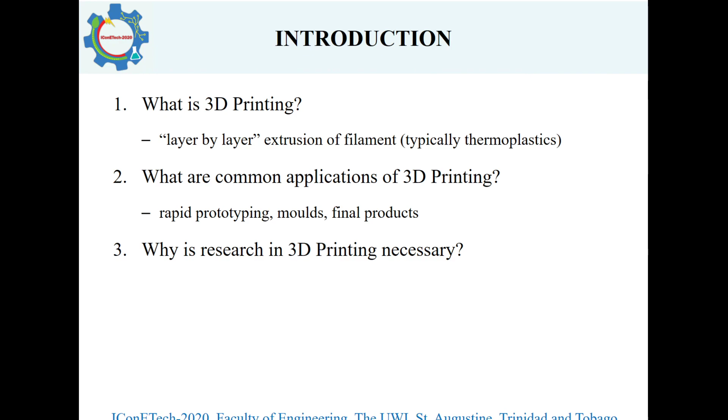Why is it important? To compete with traditional plastic forming methods, products made with 3D printing must have comparable or better mechanical properties, meaning research and development in this area is very important in making 3D printing a viable option for manufacturers to generate revenue and diversify the economy. What type of research is required? The key research areas include how the chemical makeup of the filament and the operational or print parameters being used in the process affects the mechanical properties of the final product. That is, strength, heat resistance, among others.

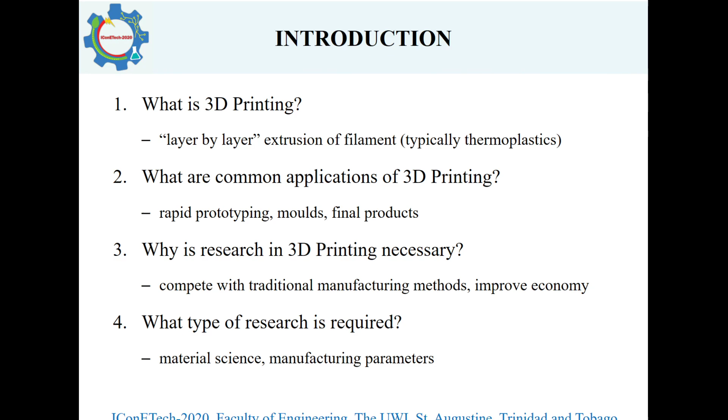This brings me to the objectives of this paper, which are to look at past research trends in a literature review to determine what materials, print parameters, response variables, and optimization methods were used previously in order to perform a gap analysis on the data to see where we can add value. Then we will want to develop an experimental setup, perform the experiments and collect the data, analyze the data, and then perform optimizations to enhance the mechanical properties going forward for manufacturers. Finally, we have to do some validation experiments on the optimized samples and make conclusions based on the outcome of the tests.

So without delving heavily into the literature review, it was found that the tensile strength was the most commonly measured property for 3D printed samples, sort of a benchmark test for strength. However, in order to maximize the use of 3D printing, products must be able to withstand forces in all directions. This will allow manufacturers to design and create products for a wider range of applications, while maintaining the strength desired for their use. As such, there seems to be a lack of information on the flexural strength of these products, which, if more understood, will allow for better design of products susceptible to deformation and buckling under compressive loads. Further, it was observed that ABS plastic was one of the most studied materials due to its extensive industrial use at a relatively low cost.

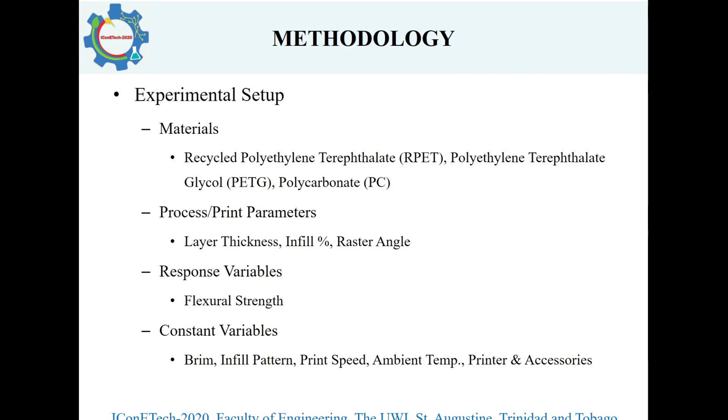So for this paper, the experimental setup includes using recycled polyethylene terephthalate (RPET), polyethylene terephthalate glycol (PETG), and polycarbonate (PC) samples, with the print parameters being adjusted for each sample: the layer thickness, infill percentage, and raster angle. The response variable being measured is the flexural strength, and some of the variables being kept constant are the brim, infill pattern, print speed, temperatures, the printer being used, and all accessories including nozzles, beds, etc.

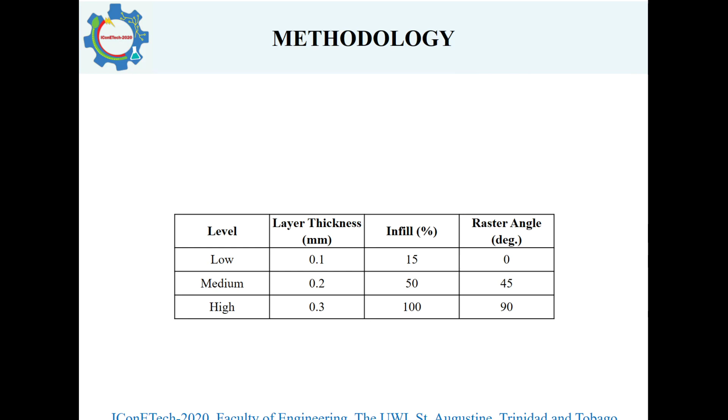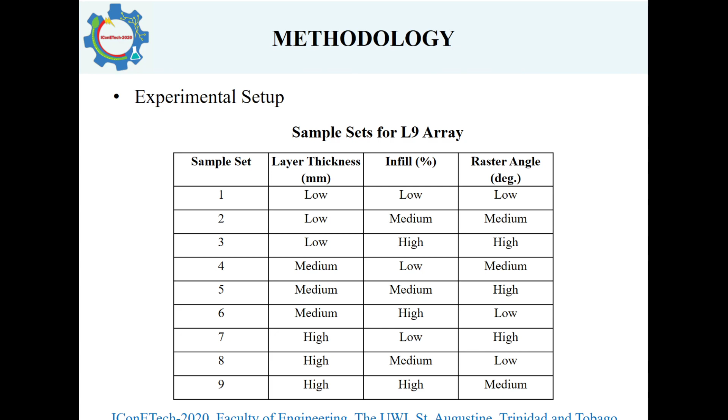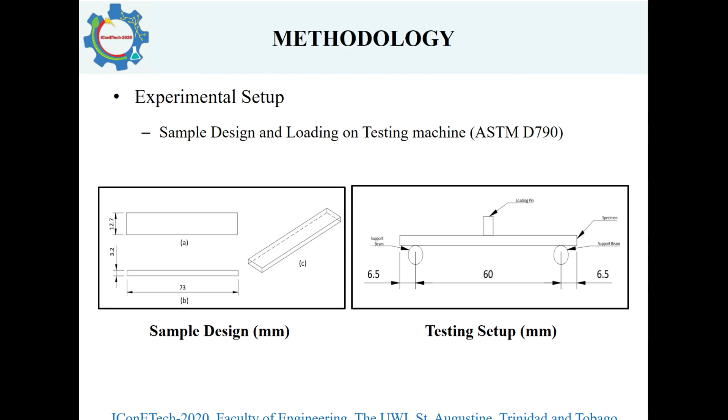The machine produces a load extension curve, which gives you the maximum force and the extension at which it occurs, using the formula in equation 1, where sigma F denotes the flexural strength of the sample at the midpoint, P represents the point load, L is the support span, B the beam width, and D the beam depth of the sample. This formula is used with the maximum load to determine the maximum flexural strength of the samples.

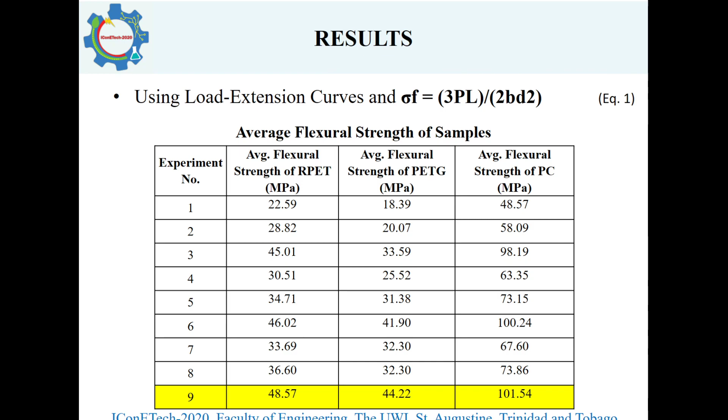The table shows the average results of 5 repetitions for 9 sample sets of each material. What is to note here is the strength of the polycarbonate, or PC, was the highest, while the RPET and the PETG were similar in strength. Finally, sample set 9 had the highest flexural strength.

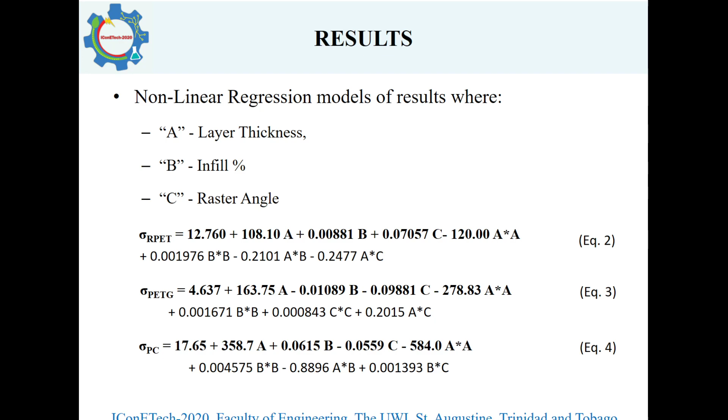Further, by the interaction and surface plots for the 3 materials, it was apparent that infill percentage had the highest impact on the flexural strength, where the higher the percentage, the stronger the sample. Finally, the raster angle had the least significant impact on the 3 materials. These equations fed directly into the genetic algorithm as the objective function being solved.

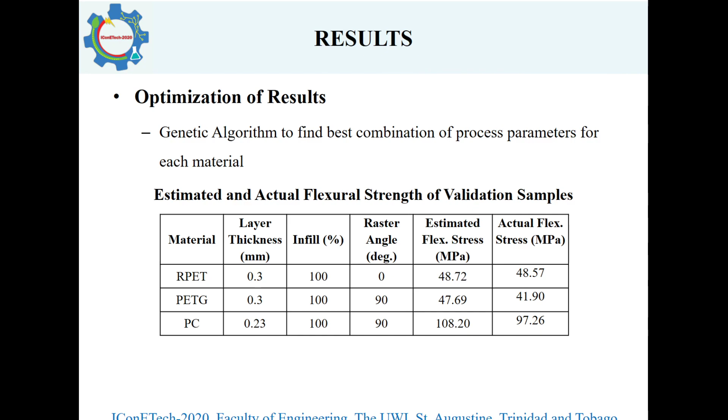The genetic algorithm, or GA, searched for the print parameters to produce the highest flexural strength, and using those values, which can be seen in the table, validation samples were printed and tested. From the table, it can be observed that the actual stress values from the validation experiments were lower than that predicted by the genetic algorithm. The RPET strengths were fairly similar, but the PETG and polycarbonate had a slightly larger deviation.

This deviation may be attributed to the GA's inability to account for all uncontrollable or controllable factors that impacted the sample strength. There may have been some unexpected interactions between print settings not considered in the design of experiments that also affected the flexural strength of the samples. There may also have been some premature convergence to local optima, which caused the GA to stop simulating before a true optimal value was found.

These issues may have been resolved if extensive work was done in testing and selecting optimal input settings for the GA to suit the data being examined. This should then be considered when doing future research using genetic algorithms or any other evolutionary method to determine optimal parameters.

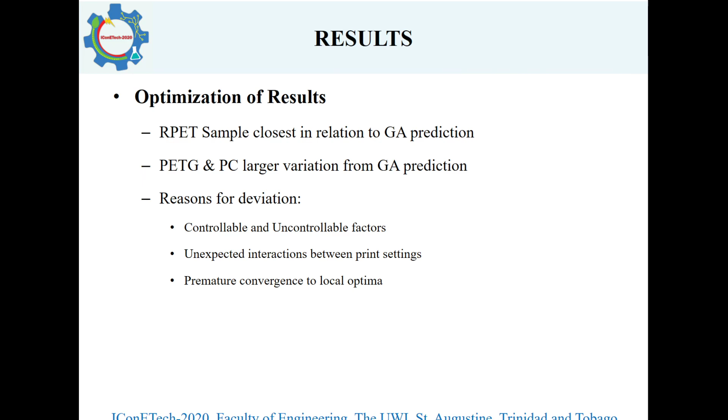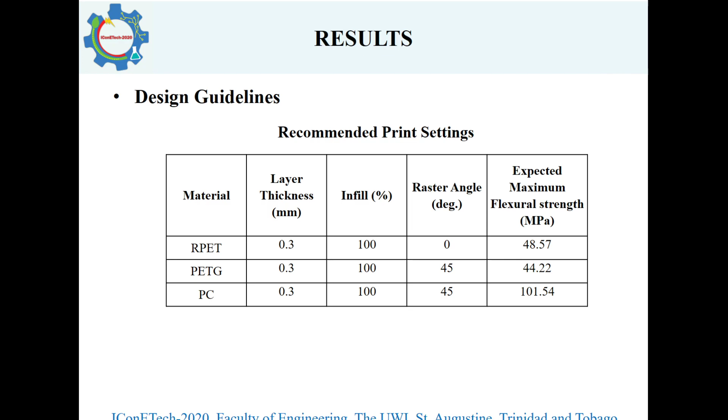Finally, a brief cost-benefit analysis was performed comparing the sample cost in Trinidad and Tobago dollars to the strength of the sample. Clearly, PC has the highest strength of all samples, but also has the highest cost. Polycarbonate can be used where high compressive loads and rough external factors are expected, such as industrial housings or casings, exterior lighting fixtures, and furniture.

PETG is a much more economical choice as it is much cheaper than PC, but also still relatively strong. For the recycled PET, the current cost of production may be high, but this is expected to improve as the recycling process is refined and optimized, and the cost of filament is reduced. Due to similarity in materials, RPET and PETG can be used for car parts, storage, and clothing. However, RPET also gives manufacturers an eco-friendly option that can be advantageous in producing highly desired products.

All in all, to make the most of 3D printing, product choice and designs must consider the manufacturing process and limitations that come with it. By making suitable trade-offs, products with high customizability and adequate mechanical properties can be manufactured. This brings me to the end of the presentation.